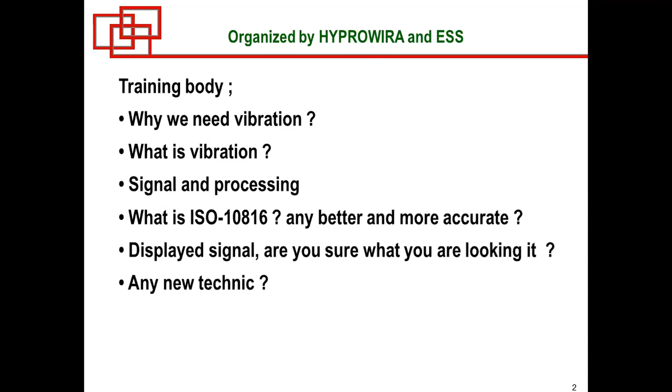Okay, let's recap why we need vibration analysis, because we are like doctors. We understand vibration helps us know machine health, like a doctor wants to know our heartbeat, our pulse, our lungs. Now we know about signal processing a little bit, so we carry on after this in the morning.

Again, I want to emphasize: knowing too much will kill you, because it becomes more expensive when you're afraid of things you never knew or heard before. But it's telling you the truth. You have to understand the language. When you understand the language, you can manage the risk - less equipment, more money, not just repair it. Just repair it before it dies, not let it die, because when it dies, we pay very expensive for the log scale.

We know about this, okay, the advantages. This line just goes to proactive maintenance. We have to be proactive, we have to know machine health upfront and manage it. This is precision maintenance. Now we work about condition-based and precision maintenance. Forget about predictive maintenance - this is wrong.

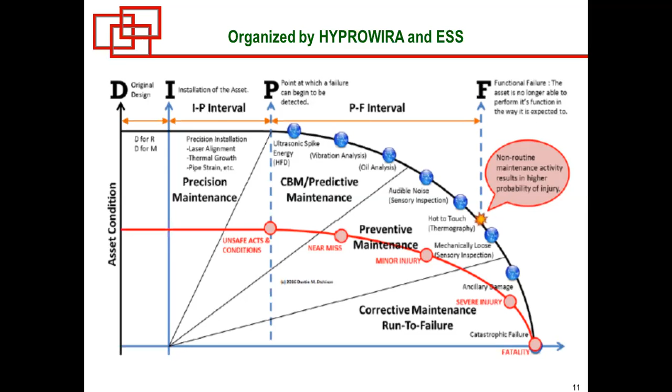That is the way - today we just live with prognosis, not predictive. Okay, in future it can be predictive. I also develop a new program to be really predictive, but it takes time more than this. Okay, now we know this.

So we have another tool to design maintenance. We will come to this in another training. Okay.

We talk about the power plant - she was crying. She said, I'm not good, I feel sick, please help me, please help me. But nobody listened, so one day she wrecked into pieces.

Now we know about Mobius, we know about the recap. Okay, we know about signal - displacement is the fundamental.

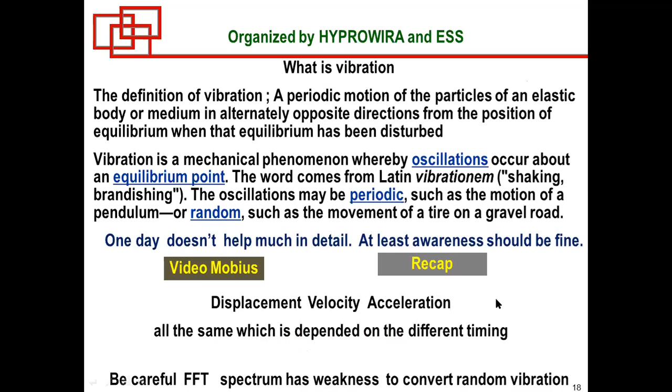Without displacement, there's nowhere to get velocity or acceleration. But in practice, we use acceleration to measure, and then we integrate back to velocity to get a better frequency response. I try to say displacement, velocity, and acceleration are all the same, just measured at different timing.

Okay, so we can integrate - that is the way. Again, the sensor measures acceleration, then we integrate to velocity, so we will have good, better bandwidth, good frequency response.

We integrate, so it becomes flat. Before it was short like this - because with velocity, we use acceleration, integrate, then it's flat and longer, with more bandwidth. That's where the measurement comes in, so this afternoon, okay.

Let's try this - before lunch, I'll demonstrate free vibration. You've never seen this in your life. I made it special for you to understand what free vibration is - it's vibrated by its own will. Its own will - that's what we call free vibration.

But the source of free vibration, we have to force this - we call it excitation. So sometimes a machine vibrates forced and free all together, always like this. So it's not only forced or only free, but mainly it's forced vibration - so it's good for you.

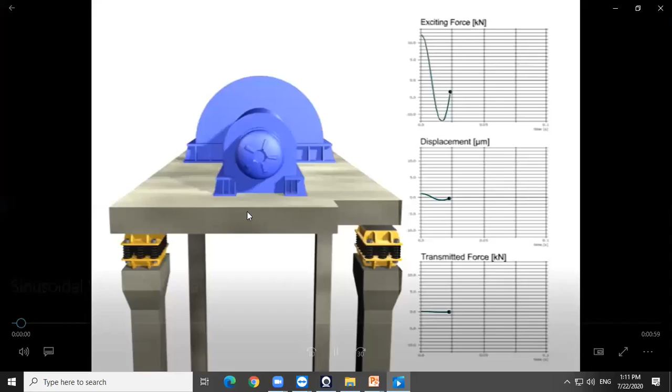Vibration in this machine first goes to a foundation, so it became forced vibration.

I check a machine. I check it, don't you believe me? I check my product, I test it, I force it.

Let me see. Can you hear me? Yes, we can hear you. Okay.

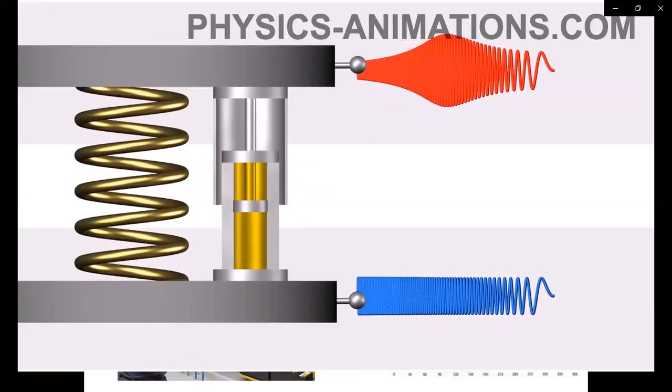That's why don't jump to conclusions. High vibration is bad, low vibration is good - no. I tell you, under this circumstance, low vibration is very dangerous because you think it's good vibration.

That's why you have to understand free vibration, forced vibration, damped or undamped. Now we talk about damped and undamped. Now you've seen the damped, right? Now we go to random.

Random is a signal that cannot convert to spectrum. You see the exciting signal is random, not a pure sine wave, and not a constant period. So when you convert to spectrum, it's gone, you don't know. That's why we cannot use spectrum in shock. In reality we have a different subject, shock only, we don't talk about spectrum anymore. We call it spectrum density - we use spectrum density for shock application, not spectrum.

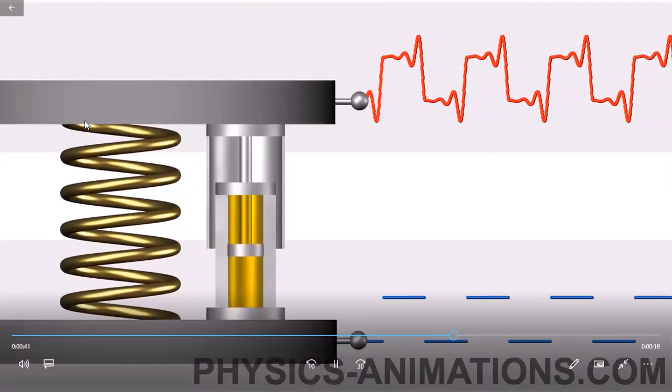Another shock and free, oh sorry. Stamping machine - bang, and then shock, then free. Shock and then free, shock and then free. Okay.

Now we come to nonlinear. Jason mentioned about looseness. Have a look at the screen.

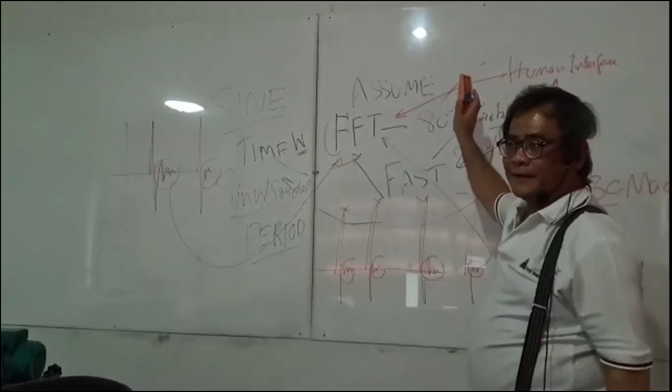Now I erase this because you understood. Okay, FFT, sine, time domain, blah. Spectrum helps you with 80% of problems. Spectrum is for humans - automatic, no need, because it's not human, it's not clever, but it's faster, never tired. Okay, 20% spectrum cannot solve.

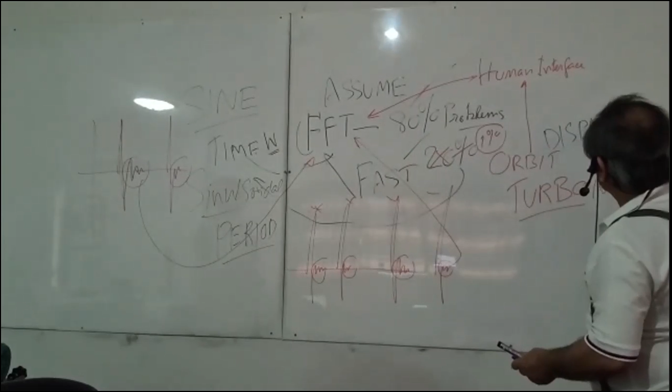So we have to go down to time, we call it time domain or time waveform, it's the same thing. Okay. We talk about orbit - today you don't need orbit. Orbit is just for turbo machinery to see the shaft position inside the bearing, what happened. That orbit is based on displacement, because I want to know where is my shaft, where is my shaft. That is the way.

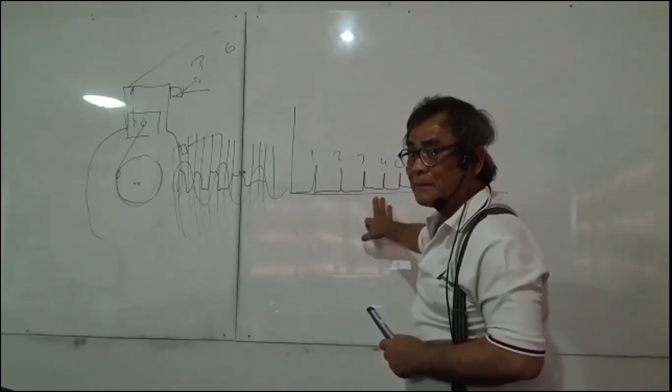Okay, let me recap again. This is non-linear. Don't try to use spectrum analyzer.

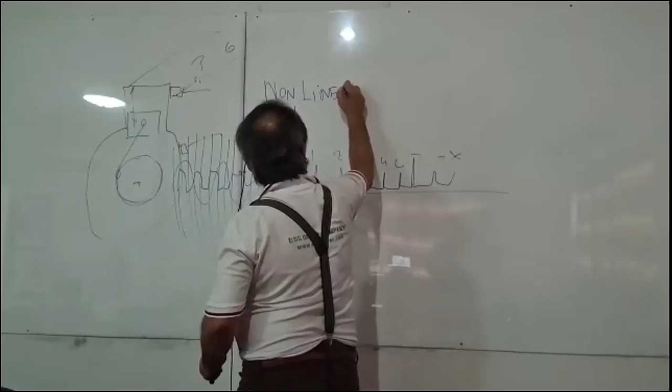Now we talk about non-linear. This is linear.

Motor running is linear. Turbine running is linear. But piston engine is non-linear. It changed from linear, curvilinear, to rectilinear. So velocity here is not constant.

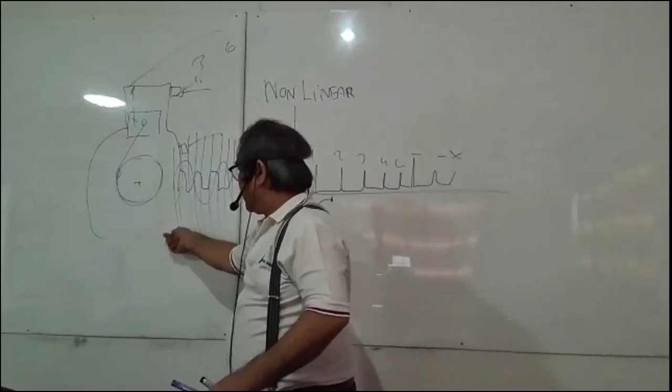Piston here is not constant. So when you integrate a signal from a time domain, this is time. Tick, tick, tick, tick. When you integrate, spectrum cannot mapping, because mapping is a frequency domain.

Let me explain about time domain versus frequency domain. Time domain is based on time. This is time.

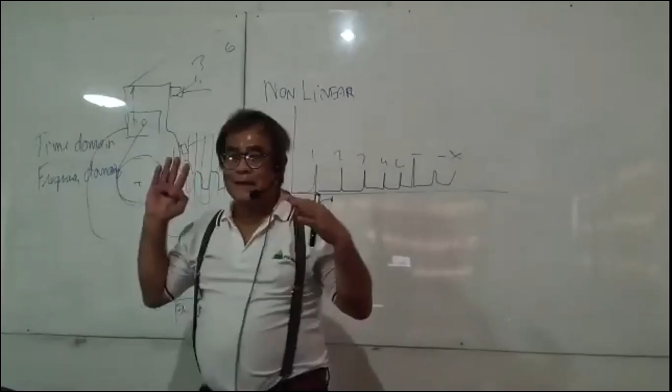Frequency is based on frequency. Different domain. You cannot change a man to a woman, or change a woman to a man. Different domain. So when you calculate a signal from time, but the signal is not constant period.

So spectrum cannot convert because spectrum is based on assuming: first, sinusoidal; second, having a constant period. That's the way when you use a machine,

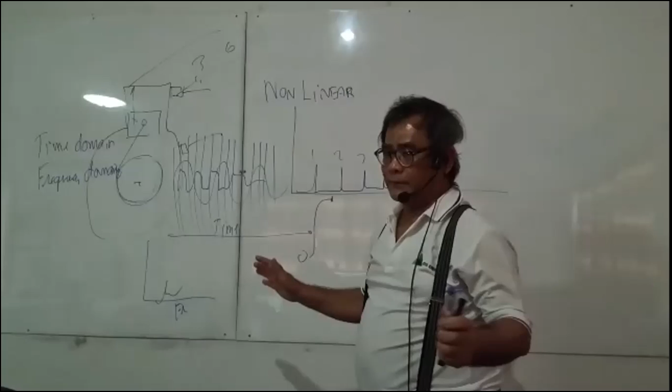vibration analyzer to detect a piston engine, it comes out like this. It's not about cylinder 1, 2, piston number 3. It's bullshit. It's totally wrong.

I believe half of you here is wrong. Not only you, the entire world, because people don't know exactly real vibration. They just follow the tool but don't know how the tool is working. Even the salesman who tells you doesn't know.

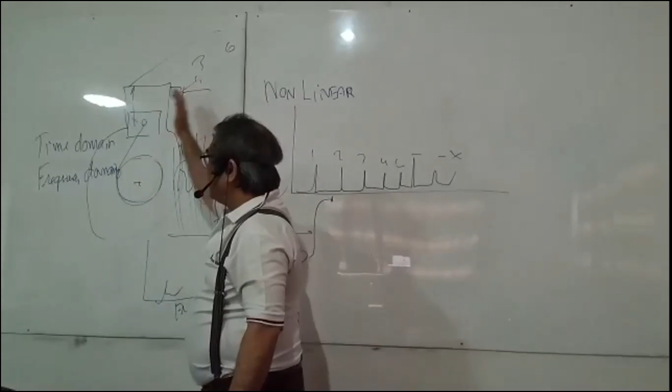So even one piston also keeps like this. Because even with 10 piston, 12 piston V engine, don't care. When it changes from time domain to frequency domain, they don't know how to do the mapping. So it comes out like this. Okay, this is the way of non-linear vibration.

So when you measure a machine with variable speed, also be careful. Before you measure, just change the variable to constant first. Then it will help you a lot.

That is not linear. This is a crankshaft. Convert curvilinear constant, change to cosine from curvilinear to rectilinear, transmit to piston. You cannot use a spectrum analyzer.

Somebody using that means misunderstanding. But people use spectrum for this machine. For this kind of machine, they use it differently.

They set frequency response much higher.

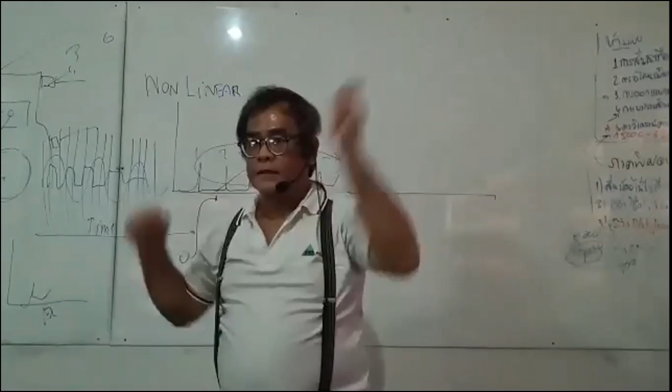They don't care about this. Bullshit. But if something is wrong with your piston, crosshead, bang, bang, bang, it tells you.

Resonance, or another word, free vibration.

You see it? They don't care about forced vibration. They care about vibration when something is wrong. They don't care about this signal here because it's crap.

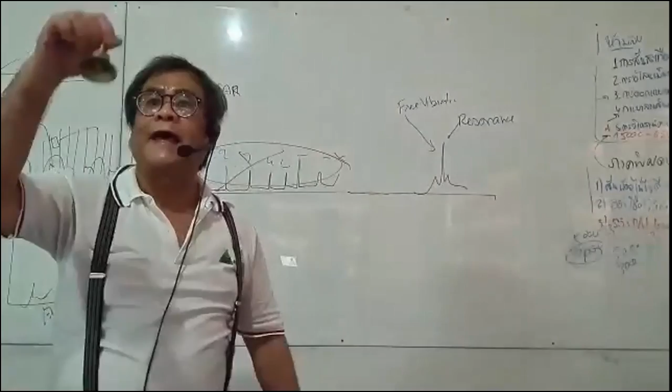They know spectrum cannot convert, so this is crap. But they set a very high frequency to see something wrong happen when the machine breaks. That's the way to analyze a nonlinear machine. However, in the last session today, we will come to how to measure this, but not with spectrum.

We have ISO standard 10816 dash 8, new. You never heard of it, right? Because we know only...

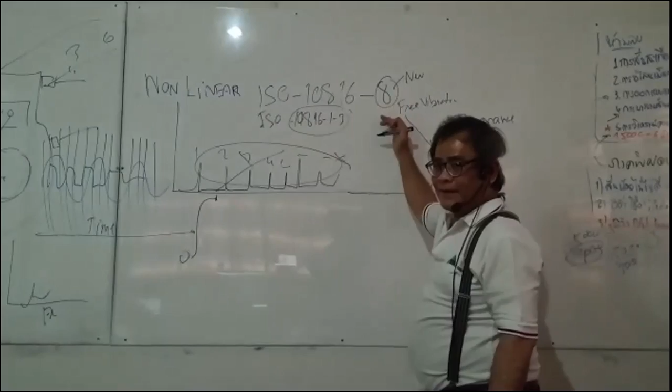Here we have number 4, number 5, number 6, 7, and today we have 8. So number 8 is for non-linear machines and is very difficult to measure.

10816 is not difficult to measure, it's not easy to measure. Okay, it's complicated. I will come to that in the last section.

Okay, next. That is the signal, you see the signal here. It's not periodic, sometimes high, sometimes low, something like this. So when you convert to spectrum, you lose information.

Next, today we talk about lateral vibration. The meaning of lateral vibration. I have my pen.

It vibrates like this. It will vibrate like this. This is lateral vibration. If it vibrates like this, if it vibrates like this, it's rotated and also shaking.

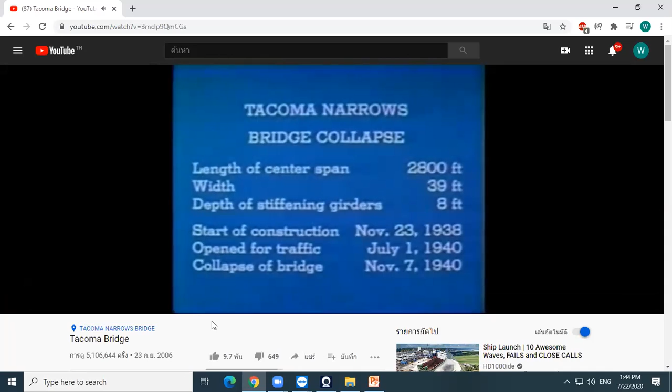I'll go first, okay. It was observed during the entire time. Here's opening day, the day it opened. Only 4 months.

It's now resonance. Resonance is free vibration in torsional mode. On November 7th, the bridge suddenly went into a twisting motion.

The wind speed was a steady 42 miles per hour. This was enough to keep the bridge oscillating in one of its natural modes of vibration with a period of 5 seconds. The bridge is vibrating. It's by natural mode, that is free vibration, at the frequency, he talked about 5 seconds. We will count the 5 seconds later.

It's vibrating because of fluid induced effects. A professor of engineering went out to see what had happened. He's coming back, walking with some difficulty along the nodal line, which is the center stripe of the roadway.

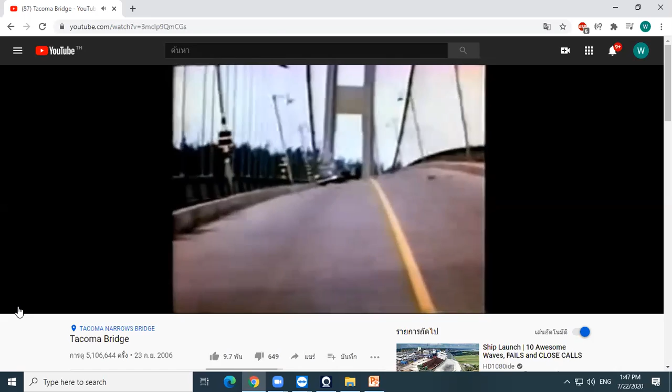The car had been abandoned earlier. No one was injured in the whole affair. However, a small dog in the car was frightened and was afraid to come out, and he perished along with the bridge. So the dog died.

Now it's breaking. You see from the dust, it's not strong wind. That is a way of fluid induced vibration, combined with resonance or free vibration.

That is fluid induced. Exciting vibration comes from either unbalance, geometry offset, or fluid induced. Only fluid induced.

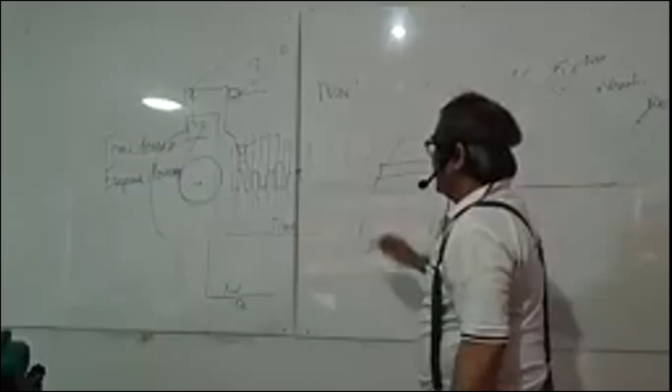A blade cross section from the video we have seen is a long blade. When the wind blows, it creates vortex. When we have vortex, it lifts, it pushes. That's why it vibrates in torsional mode, like this.

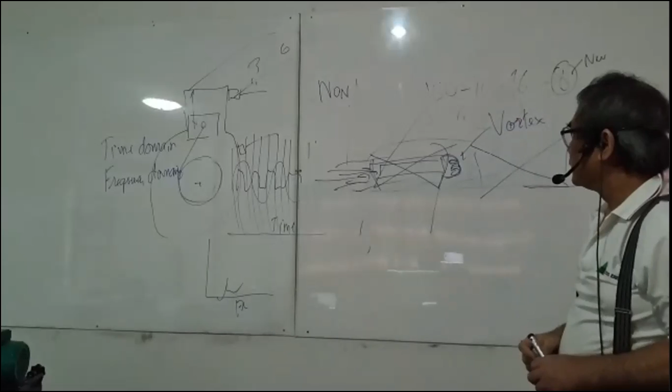That's when it collapses. I mentioned about this vortex. Because when the velocity coming here becomes turbulent, it's vortex. Pressure here is different, then it pushes. Vortex collapses again, it pulls back. Push, pull, push, pull, pull, pull.

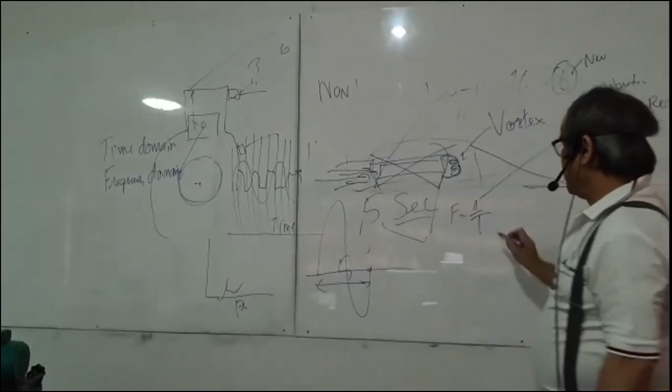At the same period, he said in the video this vibrates in one circle every 5 seconds. How many hertz? F equals 1/T. F equals 1/5. How much? 0.2 hertz, very low frequency.

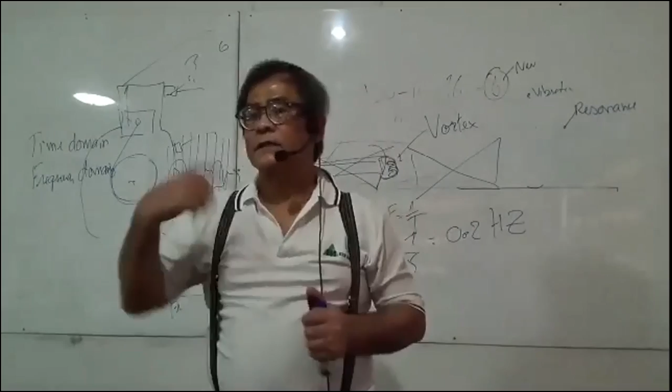In our machine, we never measure this velocity. Most structure vibration we talk about is 1 hertz, 2 hertz, 0.5 hertz, 3 hertz, because our machines are limited to mostly 10 hertz. Some machines have 1 hertz, like a big hammer mill in a cement factory. It's very low speed. You cannot measure vibration meaningfully for this.

We measure something else. Any machine can be measured, but people don't know how to do it, and they believe people's lies - 'oh I need this' - but it's not. The point is people try to detect vibration, but there's no vibration there, because at 1 hertz, very slow, there's no dominant effect from unbalance. No way, even with 100 kilo of unbalance, it doesn't give vibration.

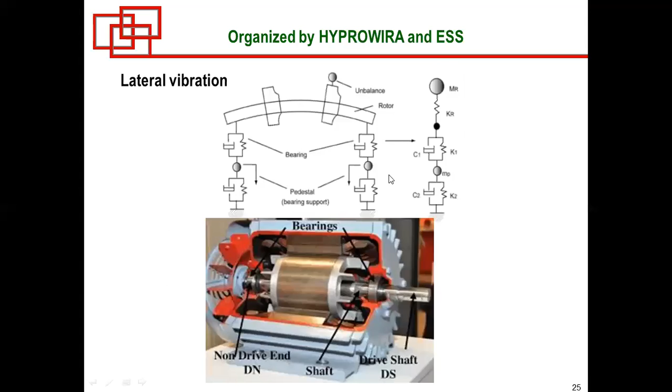Okay, now I ask you: unbalanced, force or free? Misalignment, force or free? Bearing, force or free? Electrical problem, force or free? I ask this question because you have to understand this. I gave you all this information, everything. Now I ask you, unbalanced - force or free?

Unbalance is a force because the source of the vibration origin is force. Misalignment is force. But unbalance can also be a combination with free, like a bridge failure or bridge collapse, because force and free are superimposed. Bearing, we have both force and free. Electrical, also force and free. Here's the answer: because it's forced by electrical current, it's not about vibration, it's not related to vibration.

This problem mostly happens to two-pole motors, which are very sensitive to electrical problems. So this is the answer: force, but sometimes also a free combination. Misalignment - force. Bearing - force and free, depending on the failure phase. When we learn about bearing, we will learn about the phases of bearing - before it fails, it starts from phase 1, phase 2, phase 3, phase 4. But not today.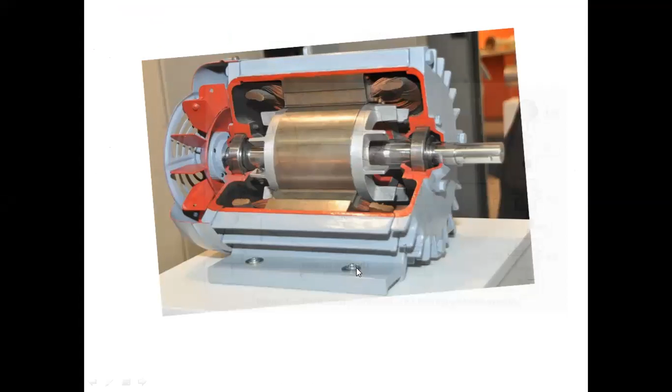But the real world is not a rigid body. Now you can see the motor - I'm switching between two drawings. That's what happens there. It vibrates, and the point is it has not only this axis - because even with this, we have 3 axes already.

But it helps you understand better. So that stands for 1 degree of freedom. If you understand 1 degree of freedom, that means you understand 3 degrees of freedom. But in reality, we talk about 5 degrees of freedom.

So let me pull this down here. A circle here is bearing - here is a bearing. Footing - here is footing. That is the way.

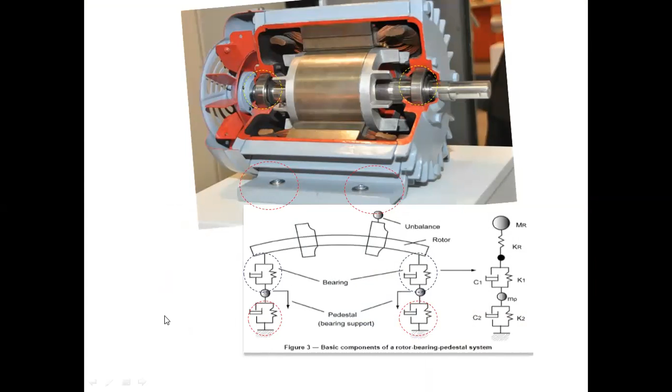Again, no young people - old age, middle age have experience. New people cannot interpret vibration because you have to know machine design, understand the machine. Jason just mentioned this in the morning, right?

Don't look at the wall chart to see what the spectrum looks like and then point out that's a problem. It's not like that, okay.

Now, here - 4 bearings, 2 bearings on the motor, 2 on the pump. That's why we have to measure X, Y, X, Y, X, Y, and Z, and Z. In this case, it's 2 Z's. That means we have to measure 1, 2, 3, 4, 5, 6, 7, 8, 9, 10 - we have to measure 10 points.

10 points to understand 5 degrees of freedom. Let me repeat again, we have to... Yes sir, okay, we have to measure 10 measurements for this pump and motor string to understand the 5 degrees of freedom of pump and motor.

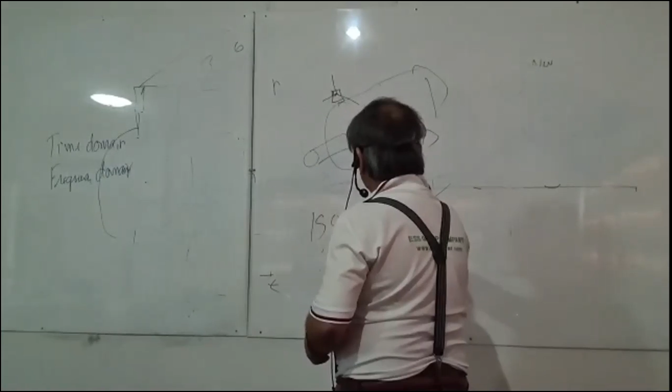ISO standard 13373 not allowed, NASA not allowed. You have to measure here, here, here. Because who knows? The machine may vibrate at this form, maybe vibrate at this form. Then if you only measure this one, you lost.

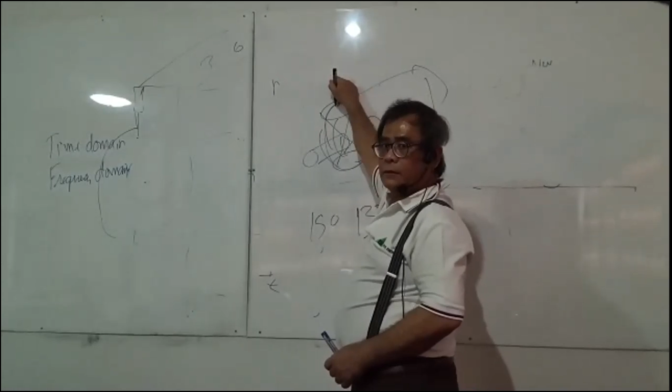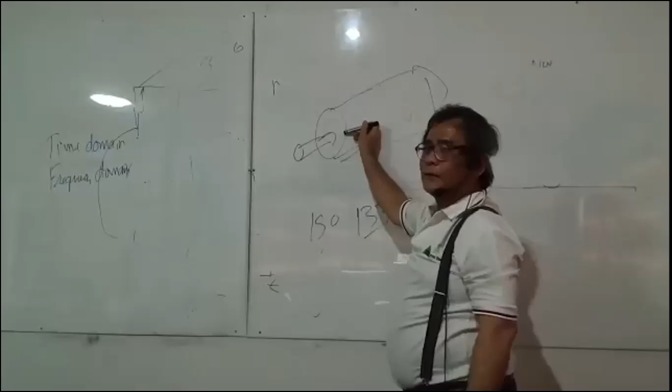Only 5 minutes longer, why so lazy to measure? See my pen? I can vibrate like this - I mean the machine can vibrate like this. Again, it can vibrate like this, we can vibrate like this. And you just rely on one point? Put the sensor here with 3 axes, otherwise you lost. Just measure 1, 2, 3, 4, 5 - what's the hell? Just 2 minutes, 3 minutes, not so crazy, 1, 2, enough. No, be careful, sales people will lie to you like this. They can tell you, I can put an elephant in this small hole.

So this is an ISO standard. We have to measure X, Y, and Z - see, X, Y, Z, it's standard. In the vertical machine, you have to put it like this, this is standard. Even the numbering, we have to put it like this - number 1, number 2, 3, 4, 5, 6, like this, according to the process flow direction. This is standard, okay, that's the way to measure. Not relying on just one sensor standing for 3 axes - you're wrong, that's not the way of measurement. This is IEC motor, how to measure.

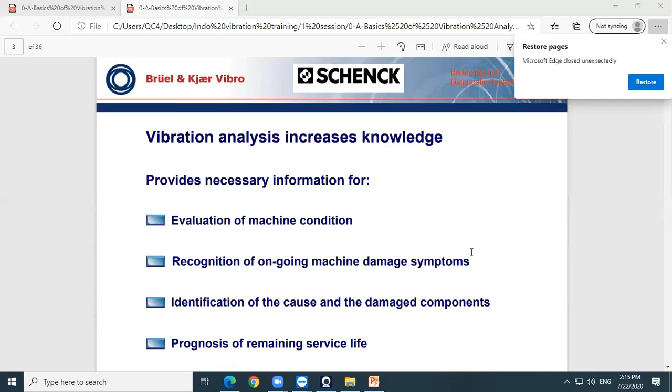You have to evaluate machine condition. Why do we evaluate? Because we want to manage the risk. We have to evaluate the machine because we want to manage the risk. Why can we manage the risk? We have to recognize an ongoing machine damage or symptom. We have to identify the cause and damage. Then we can make a prognosis - that means we manage the risk for when it's going to fail. So be careful when you measure vibration and then tell the boss, hey, we have to do this because of this - no, okay.

Okay, we don't like this - this is hard to explain, we don't want it like this. Too late - the cost of this repair is not just the bearing. Sure, we have secondary damage, and the cost is higher than the bearing itself.

Diagnosis method: vibration analysis. Vibration is good for dynamic analysis, but sometimes you have to use another method. In your case, maybe you don't need to see expansion, except for the steam turbine - sometimes we have to measure expansion of the turbine casing. We have to measure temperature, phase, lubrication analysis - that's your job, right, HYPROWIRA. Sometimes you have to use ultrasonic sound or X-ray, but for this one we have to stop the machine. With vibration, we can measure while it's running, so it's good, it doesn't disturb the operation.

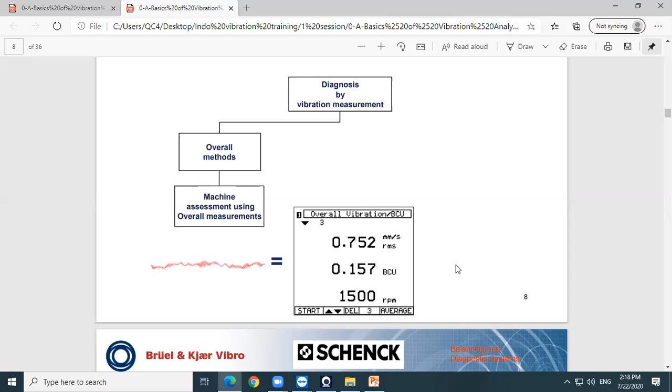Today it's still used in ISO standard - ISO stays on the overall method. It makes it easy, but it doesn't go into deep detail analysis. I tell you, today NASA also does not accept the ISO standard. I will show you in the last section. That's the way, that's the method.

Spectrum. This one is free vibration, so we go to bump test. Sometimes we have to discriminate a signal in front of us - is it forced or free? Sometimes we have to prove free vibration to see which one is forced or free.

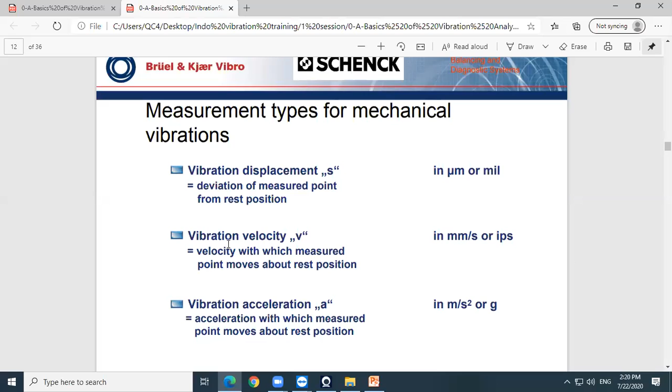That's the way to measure vibration since 1926. Today's machines - okay, not today, in the past machines - today is not. So we measure vibration, which is displacement. But practically, we measure acceleration and then indicate velocity. So the unit of displacement is micrometer, mil, something like this. Velocity is millimeter per second, inch per second. Acceleration is meter per second square, or G. Somebody still uses G today.

So we talk about signal - we have narrowband and broadband. ISO standard is based on energy covering 10 hertz to 1000 hertz. Again, don't use this everywhere - this range is just for ISO 10816.3 only.

Okay, narrowband - today we go to spectrum. But before, it was not, because there was no spectrum. At that time we had to use a tracking filter. Today we don't use it anymore, but this technique we still use for balancing.

Balancing today, that's the way of unit. I mentioned about the 220 volt AC line. We talk about 311 zero to peak from your electric in our house. So when you say RMS or peak, depends on you, but not peak to peak. That's for displacement. But I recommend you stay with RMS, unless for special case.

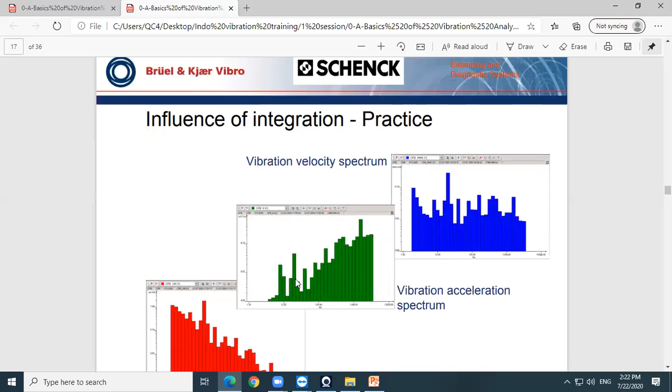This is old fashioned, no more used today. This is still used in the sound analyzer, but vibration no more, because today our digital is much faster. But see it: displacement, low velocity, low frequency is very good. When it runs faster, it's no good. If you go to velocity, it's flat. If you go to acceleration, low velocity, low frequency, no good, high frequency good. That's why we indicate this to this.

So mostly for vibration, the minimum machine start is 600 RPM. So we mentioned to measure 10 Hertz to 1000 Hertz. This is ISO standard, ISO 10816, that's part 3. Sometimes we measure another frequency band. Now you understand this already, right? Mass, spring, damping, stiffness, it's the same, you see.

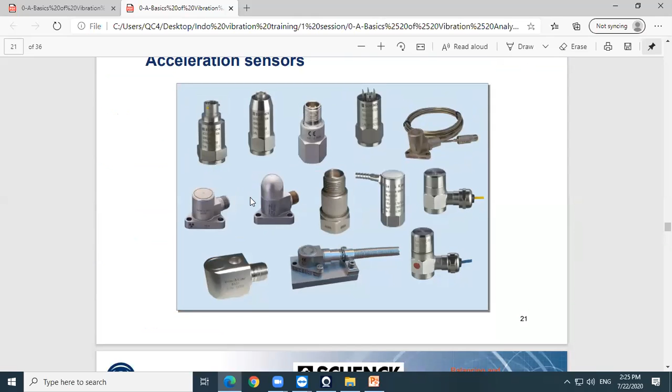Again, the way to measure, that is the kind of sensor. You cannot see the sensor and tell this is acceleration or velocity. You cannot, they all look the same. We have to look precisely, then you understand from here, because by the number, sensitivity will tell you acceleration or velocity. But today we stay on acceleration, much better than velocity. But if you use velocity, you don't need to calculate, I mean the calculation is done inside the machine. We don't do it, the machine does it.

That stays in the expression, that's relative. Yeah, this is absolute. That's a sensor of relative, it works differently, it works on eddy current. I won't come to this, don't come to this, just pass this. This is the sensor, mounted on this, to see how the shaft is moving. That's why they need two axes.

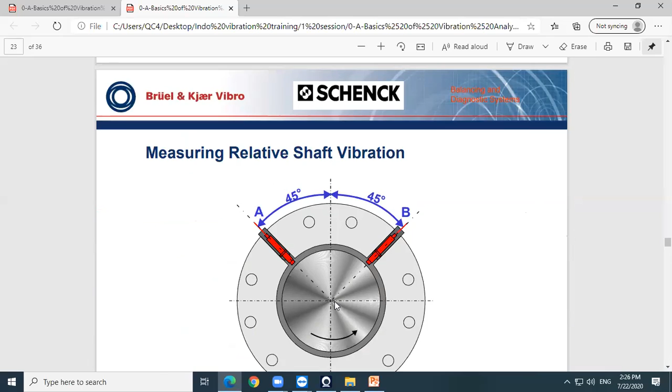I tell you this is wrong, outdated, sorry. Today we have up to number 6. So ISO is separated into parts, this absolute, this relative, you see. For machines, today we don't use number 6 anymore, now we came to number 8. When you measure engine, you have to use this number. So don't mix up, I saw many people use this one to stand for everything. It's wrong. And most importantly, this is not spectrum, this is not narrowband, it is overall vibration. So don't try to interpret spectrum based on this, because it's not a sine wave, it's the real world.

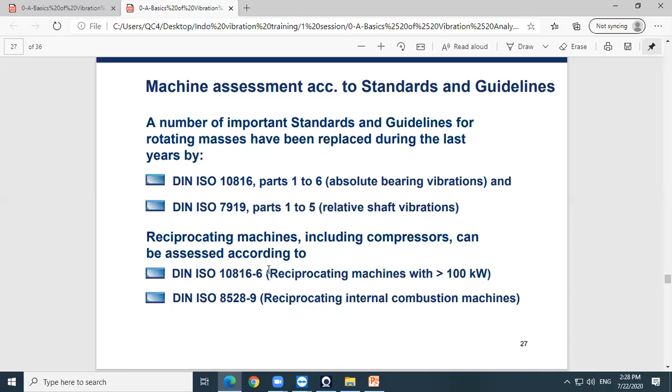That's where to measure. We don't need to understand this, I mean we will explain later. Okay, that's a bearing, we just pass this first.

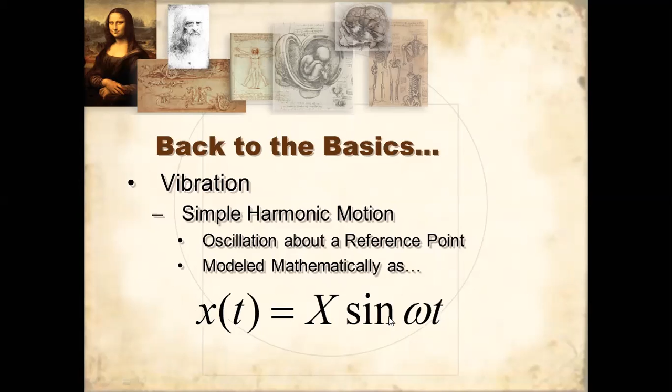Basic: static is slowly, like temperature. Dynamic is fast, like vibration. Dynamic signal, fundamentals are amplitude, frequency, time shape. Amplitude, you know already, a proportion of severity of vibration motion, expressed in peak to peak, zero to peak, RMS. I mentioned to you, stay on RMS.

Frequency, some people use order, that means X1, X2, X3, or 1X, 2X, that is. But be careful, vibration is not only X. Expert people must be able to analyze non-X. X is simple.

Signal shape, waveform, simple, complex. We have to do pattern recognition. But as Jason mentioned, even if you look at the wall chart for the pattern, you can't just conclude the problem. You have to know the machine.

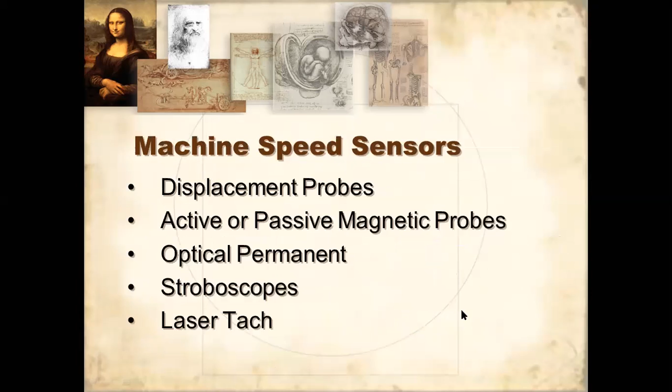That expression, when you look outside, it's the same, so be careful. Frequency up to 10,000, 15,000 hertz. Okay, this one, no, only 1,000. Sensor can output 4 to 20 milliamp or whatever, depends on your requirement.

Okay, now we talk about the signal. Vibration is AC. DC is just a static signal. Different.

Okay, this is our job to make it right.

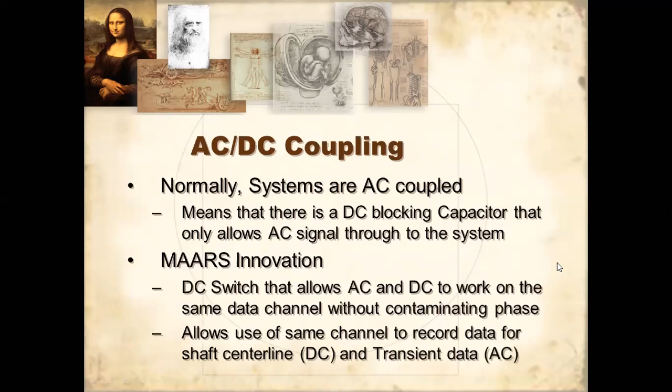In the morning, we mentioned about sampling, 1,028 samples per second. You see, if you're sampling too slow, a signal like this becomes only this, so you lose information. That's why sampling has to be very high. By standard, we have to oversample 2.56 times above the maximum frequency.

So today, if your machine still has sampling of about 1,040 or something like this, its limit is only 1 kilohertz. So don't let people lie to you.

I just had this one. Okay, this is the way when you convert a time waveform to a spectrum, we have leakage.

I tell you, this is assuming everything, even leak. We are allowed to leak frequency, or allowed to leak magnitude.

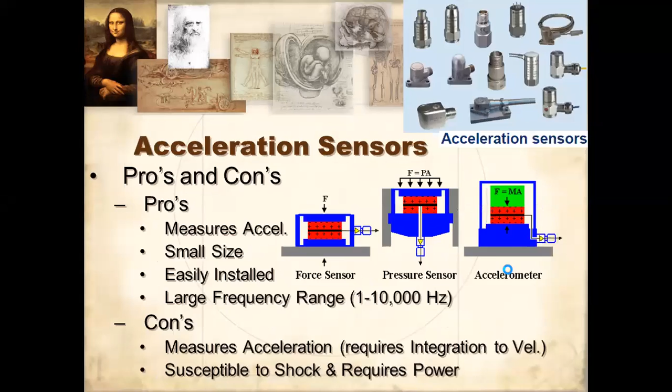Oh, here, that is the meaning of window. So we use Hanning, we have a very good frequency. We have Hamming.

We have better frequency, but we lose the signal here. We have Blackman, we lose frequency but we get accurate magnitude. That's the way when you set it up in the machine. But in VMI, we stay constant with Hanning to avoid setup issues.

That's when they leak in the signal, okay, that's the way it leaks. This window, when you convert to spectrum.

Again, lines, today it's no more limited. Okay, ours is about 3,200 lines, right?

So today the lowest line count is 3,200 lines, but I wonder some people still use 400 or 800. In the morning I mentioned 1,600 lines, no, that's not it, it's my mistake. Minimum is 3,200.

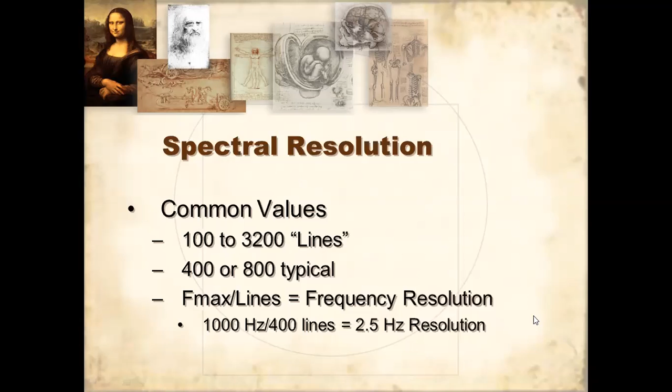Okay, that's the way I mentioned about integration, and you cannot integrate when you integrate a non-linear signal, because you don't have a constant time. We don't have constant time, that's why it cannot integrate.

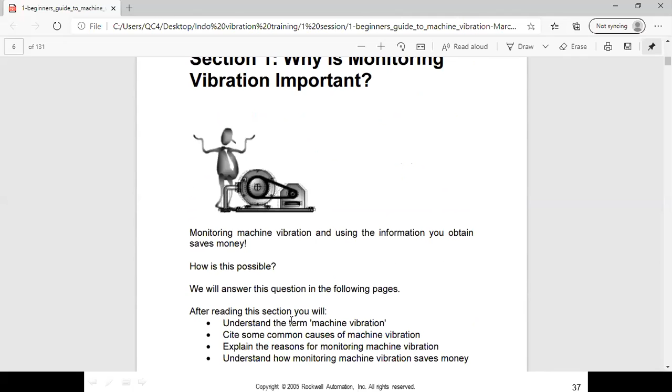Okay, now we explain since I've been talking since the morning, why, so no need to repeat, okay, just go quickly. We know it because we want to monitor it. To monitor it, too many exist. You know vibration, right?

I'll give the answer - the cause of vibration. Be careful, this is not the cause of vibration. Looseness doesn't cause vibration, it's a consequence. So be careful. Resonance is not the cause. The cause of vibration is only unbalance, misalignment, fluid induced. That's all it is. The rest is all consequence.

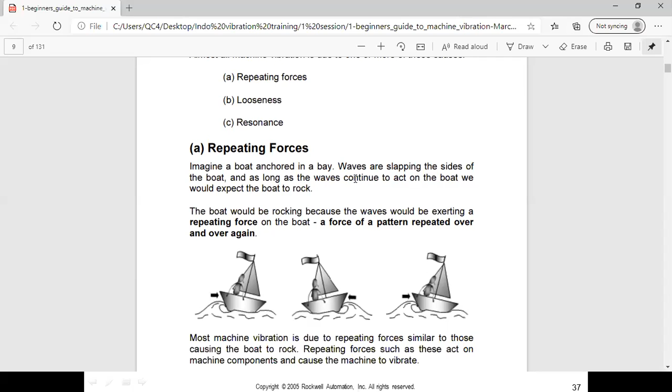Of course, unbalanced misalignment is a repeat force. A bridge collapses because there is a force from wind, because wind excites, sometimes we call it wind-induced vibration, causes the vortex and then pushes the bridge. Then it synchronizes with the bridge's own vibration, what we call free vibration or resonance, at the same frequency. Then it magnifies until the bridge breaks, non-stop.

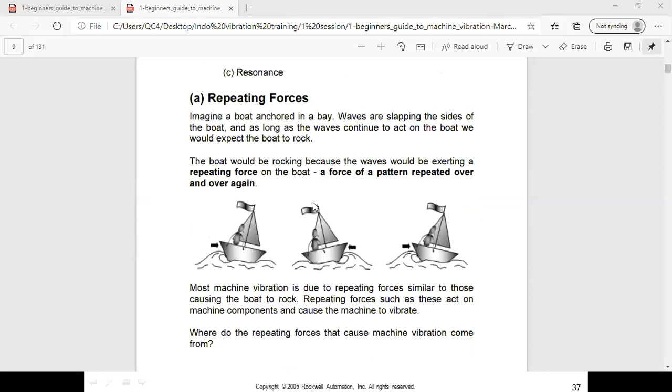So that's the reason for the bridge collapse: you have repeated force from the wind, coinciding with its own free vibration, which magnifies the vibration. That's the source of vibration.

Unbalance, misalignment, looseness - we can see this in the spectrum. That spectrum cannot convert properly. It will show you x1, x2, x3, x4 because the movement of looseness is non-linear, the same as a piston machine.

Resonance - that's why the bridge collapsed, because of resonance. Resonance and free vibration are the same. You see, a child on a swing is free swinging.

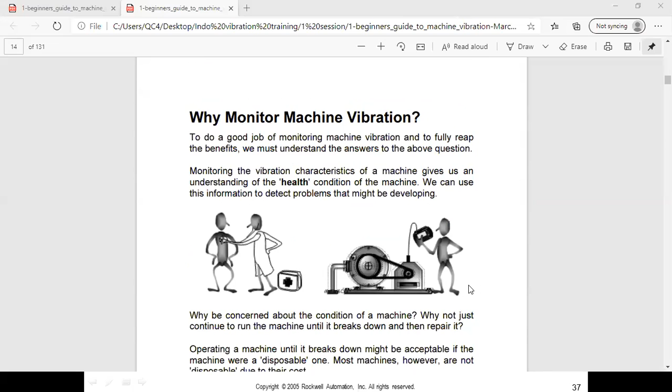Why do we monitor? Because we are like doctors. We manage our health, we manage our life. That's the way, that's why I want to go over this.

I don't talk about power consumption, but it saves you money. If you have high vibration, you waste money, in terms of power.

You know why? Motor speed is telling you 1,500 RPM. What is telling you 3,000 RPM? Line frequency. The motor doesn't know how fast it's running - it tries to synchronize with the line, no matter what the load is.

So when we have vibration, the motor wants to rotate, not shake. It doesn't know about shaking - it tries to synchronize with the line frequency. So you lose power efficiency, that's why you pay a lot of money for power.

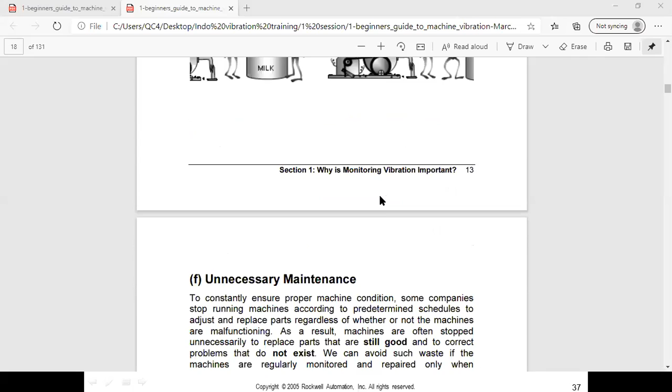Okay, that's it, I won't go into detail about this. People come here because I think you already know vibration.

How is machine vibration measured?

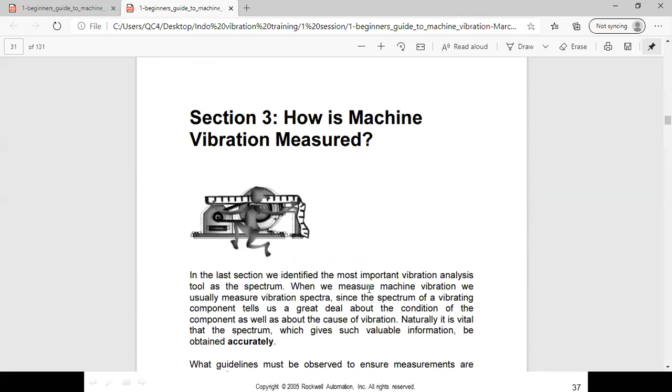Okay, this is the list, no problem. Today we go just to basics.

Okay, now we've finished signal processing. Now let's talk about ISO 10816. What is this? Is there anything better than this?

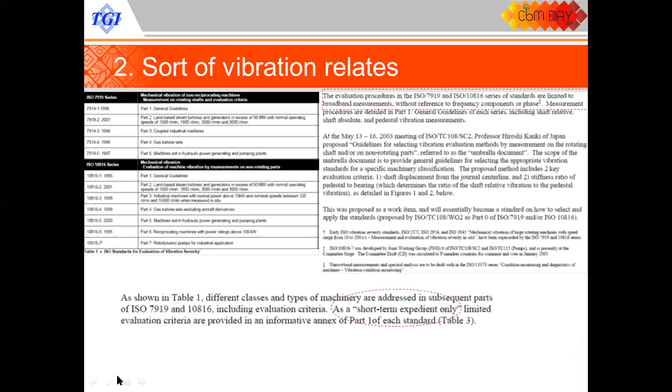Today we go up to number 8. We've improved from number 6 to number 8. But in your application, mostly you use number 3. For relative vibration, we use a different number.

So don't try to use your vibration meter to measure a turbine - it's meaningless. ISO 10816 decides to detect industrial machines from 15 kilowatts, at speeds from a minimum of 120 RPM to 15,000 RPM.

But when you measure at 120 RPM, you have to set differently. People never set it though - they all stay at 600, not 120. So that is the way we detect 10 hertz to 1,000 hertz.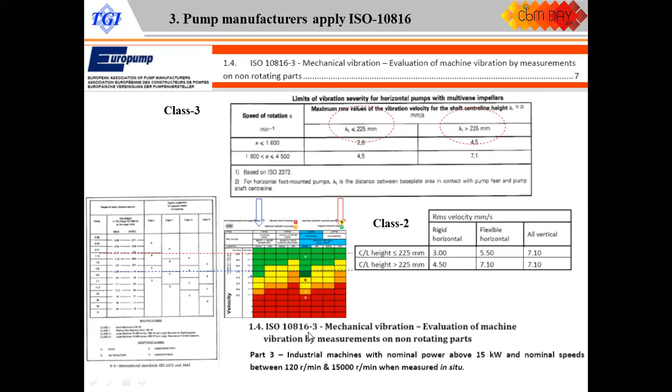Now I'll show you - the left side is from the factory. If you compare it to standards, it gives you red already - it tells you fail, even though it's brand new in the factory. So be careful when you use this standard.

I don't want to go into this, no need to confuse things.

This standard is derived from energy - how many million revolutions until failure.

I don't want to talk about bearings, let me move on to the next training.

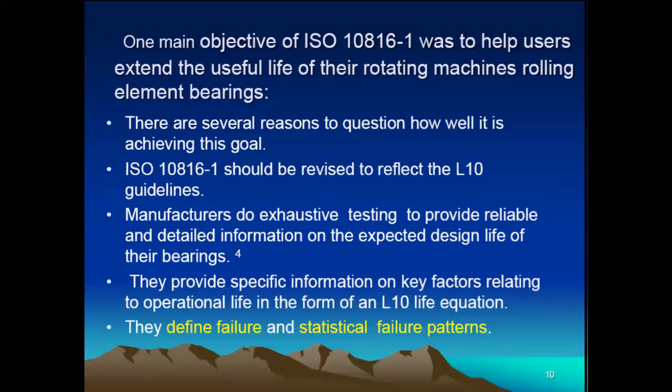Okay, next training we'll go into bearings already - we'll talk about bearing design. Today I just want you to understand the basics of vibration.

I'll just give you an example - this is ISO 10816-8, very complicated. So don't use even spectrum here. We don't talk about spectrum in the ISO standard.

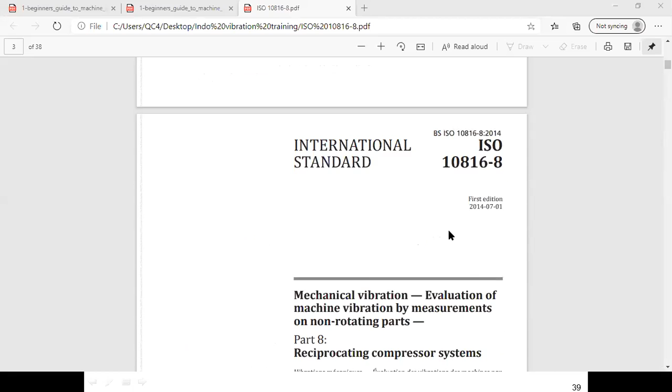We talk about ISO 10816-8, this is for piston machines, like reciprocating compressors, because it's non-linear. It's not really about non-linearity, but because for ISO 10816 you cannot use spectrum.

Again, I want to emphasize: when you analyze vibration, don't use spectrum to compare with the ISO standard - totally different. In ISO, we talk about energy in the overall frequency. Spectrum is discrete frequency - different.

That's the way. It's a machine, that's why we have to measure three axes - and not only this, that's the standard way to measure.

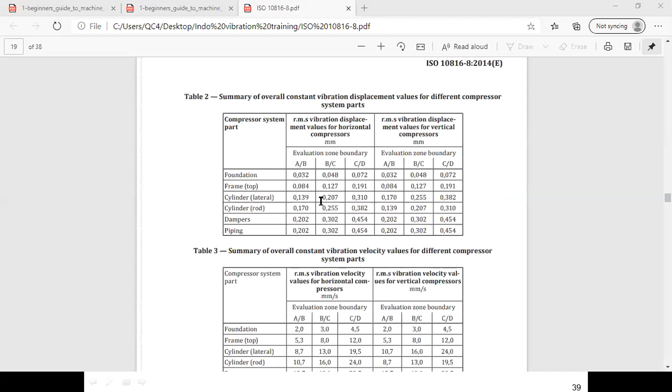Then we have to measure like A over B, B over C. When you do measure foundation, the value must be this. They don't talk about the value alone, they talk about the value ratio. You see, it will complicate. This is number 8. Just A over B, B over C, C over D, like this ratio. Because this machine, by its nature, is already vibrating, that's why they have to put ratio. Okay, let me stop. I just let you know the overview of vibration.

Number 3, everybody knows it, everybody lives it, but don't understand precisely.

First of all, it's based on velocity and in RMS. And here they have 2 bands set. If you set 10 to 1000 for the machine running above 600 RPM. If you go to measure like a cooling tower fan, we have to set 2 to 1000 Hz, for machine that runs from 120 RPM. That is the meaning of this standard. Again, there's a pump - a machine smaller than 15 kilowatt cannot use this standard. Okay, must be this.

They classify rigid and flexible. Rigid and flexible - I ask you, what's the meaning of rigid and flexible? People assume rigid means direct mount, and flexible might be mounted on a spring or rubber mount. It's not always that. The definition of rigid or flexible is whether operating speed is under its own natural frequency or higher than the natural frequency. That is the reason, not about spring, rubber, rigid, concrete. No. So you have to know rigid or flexible to find out its resonance first. That is how to use this table.

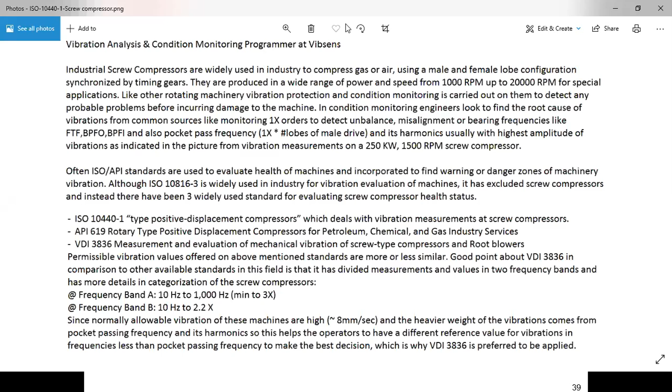And you have to measure in 2 bands - you see, 2 band, 10 to 1000, and then 10 to 2.2. That's the way to use the standard. This one is very close to NASA standard. NASA standard just splits into 4-5 band measurement. In future, maybe I will develop V-Mer to meet NASA standard. So it's your choice, ISO 10816 or NASA?

NASA has a standard, it's called the Reliability Centered Maintenance Guide for Facilities. And that's another book they call collateral equipment. That means not about rockets - only other equipment related to NASA factory, not rockets.

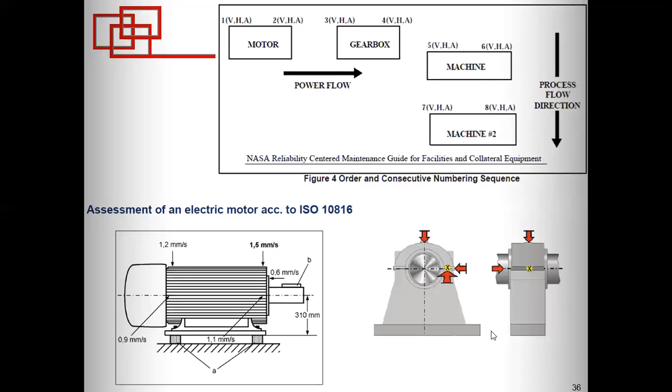Hello? Yes. Now you see me, right? Can you see my display? Yeah, yeah.

I'm very sorry, it's a coincidence. I turned on the V-Mer in the morning and just the battery is finished, because the battery is designed for 7 hours continuous.

Okay, new technique, we have automatic vibration. Okay, I'm sorry I cannot display it for you, coincidence, just now the battery is gone.

This V-Mer, the new V-Mer, we have multi-band analysis, we have wavelet. Again, this is for experienced people only. For non-experienced, forget about this, you just rely on automatic ISO, automatic bearing, unbalance measurement is enough. This is more powerful than most people already have. But if you are a real expert, I give you a special device to be multi-band wavelet and sound analyzer.

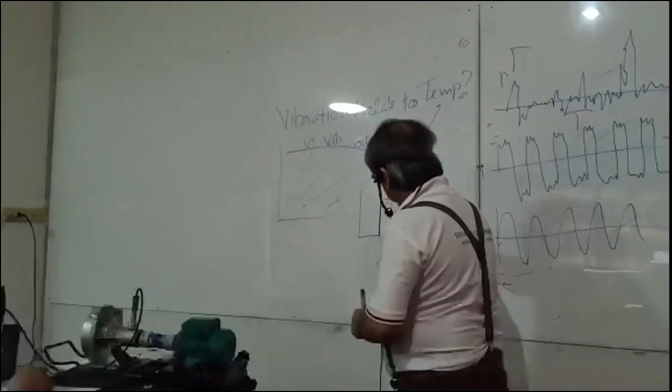By machine design rule, we have to avoid plus minus 20% from resonance. That's what the rule says. You can go to plus minus 10%, but you have to precisely study it. Resonance, again, you cannot eliminate it, it's by nature. But we have to avoid less than that. Does that answer your question?

But in many cases people don't know, especially when you use VSD, variable speed drive, and you move to resonance, there's a problem. When resonance, when you're feeling, touching, is a lateral vibration. We also have torsional resonance. That is really dangerous. Torsional vibration itself is hard to measure. So we have resonance, it's terrible.

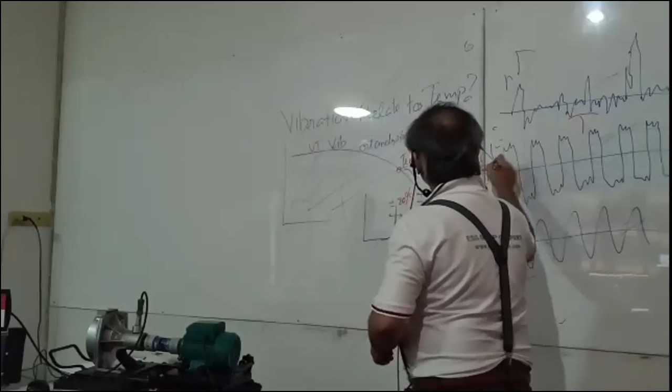If you go to Falcon, you know Falcon vibration? Falcon vibration, yes. It's one plot, right, over here, right? One plot, Falcon. They don't need bearing number. The price is higher than V-Mer, 10 times. The analysis is bearing without bearing number. That's why I tell you we can do bearing number, I can put it on. But today, digital and software can analyze more complicated things than just knowing the bearing number. But if you want, I can put it on. But we have to extra charge for the bearing number because I have to buy the bearing library and put it inside. This is a problem.

But not much, okay, but not much. You can input bearing number into the V-Mer system, yes. Okay, Kun, thank you, sir. So the V-Mer can put bearing in. Okay, but I have to put the bearing library inside. Okay, maybe next session we will talk about V-Mer.

Okay, I think we have 1 minute left. If any other concerns, sir, to present to us. Okay, we have a training like this regularly. We go to pure vibration. I don't touch any little V-Mer. So next time we train V-Mer and vibration alternately. So you set up the training. I have 4 regular trainings in Thailand. Maybe I wish you to do the same.